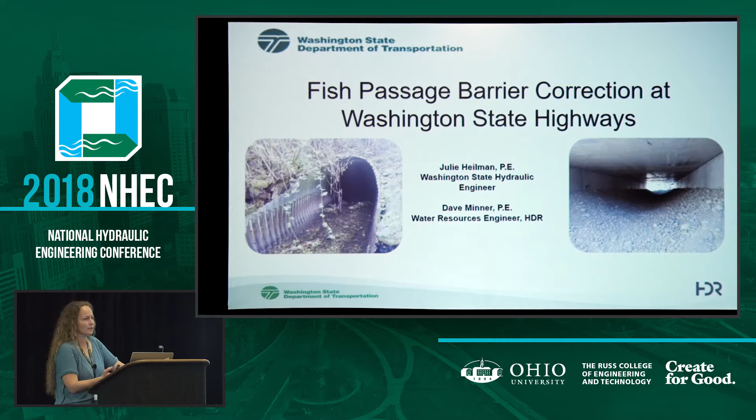So a little history on our Fish Passage program. So prior to 1991, barriers were really just addressed as highway projects or maintenance projects impacted an existing barrier that they couldn't design around. And there was not a separate program. So after 1991, the department actually developed a program. There was a small fund, which a lot of our programs have small funds. But we did have to have a priority of which barriers are to be corrected, and that's what we went to legislative for support on.

And we've kind of been working on that, you know, up until the 2013 injunction, which I'll go over in a little bit more detail. But our primary funding mechanism during that time was still state highway projects, because the funding was very, very low in just the program itself.

So in 2013, there was a federal injunction where basically the Western Washington tribes sued the state of Washington because of the impact that the barriers were having on fish harvest. And the program wasn't really dynamic. Like I said, it was very small funding, and so they wanted an acceleration of the barrier corrections because of the impacts that it's been having on their harvest, and in turn impacted their treaty rights.

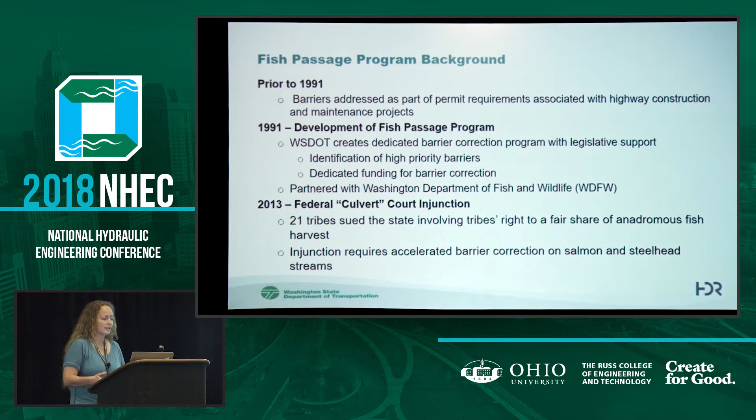So the injunction, just kind of a summary. I know a lot of you guys have probably heard about the injunction and recent appeal, which I'll get into in a little bit. But that's the area of the injunction boundary. So it was not statewide, it was Western Washington. However, our fish passage program is statewide, but the emphasis area, because of the injunction, is in Western Washington state.

So there's a lot of numbers up there, but just in summary, over 1,500 water crossings are subject in the injunction area. There's a lot more statewide, which I'll go into later. There's over 800 barriers that have significant habitat, which is greater than 200 meters of connection or potential habitat connection. Because of course there's going to be barriers upstream or downstream of ours. So we assume those barriers are gone in our assessment.

So as far as what the injunction means to our program, approximately 475 barriers are required to reach 90% of that habitat gain. 171 barriers having less than 200 meters are still required to be replaced in that injunction timeline, but we've been allowed to defer those replacements until the end of the useful life of that structure. And the definition of that is to be determined yet.

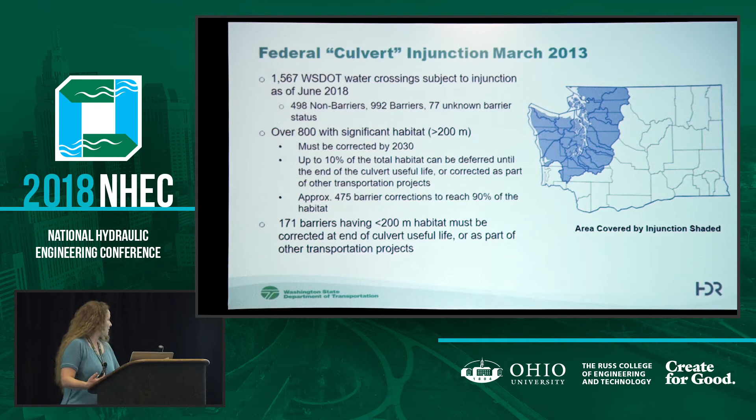So by 2030, we have approximately 475 culverts that we have to replace, and I'll get into a little bit more about that later. So as part of the program, we are partnered with our sister agency, which is Washington State Department of Fish and Wildlife. And their role is really to do the statewide barrier inventory. So annually they go out and do inventory on all of the crossings statewide. So there's over 7,000 water crossings along the state highways. Over half of those have been identified as fish bearing crossings.

So it's a very dynamic program because, again, they go out and assess it annually. So the green are corrections, the barriers that we've corrected. Red dots are total barriers, and yellow or orange dots are partial barriers. That's the dynamic part, because in one year it could be a barrier, the next year it may not be a barrier, or something that was not a barrier could be a barrier. It all depends on the flashiness of the system. So that's why it's dynamic.

And as far as the injunction is concerned, if it's within that boundary, a barrier is a barrier, whether it's full or partial, that part doesn't matter. It's an online database, so the public can access it. We use it as a huge communication tool between the tribes and DFW and all our resource agencies, just to show our progress as we're going through.

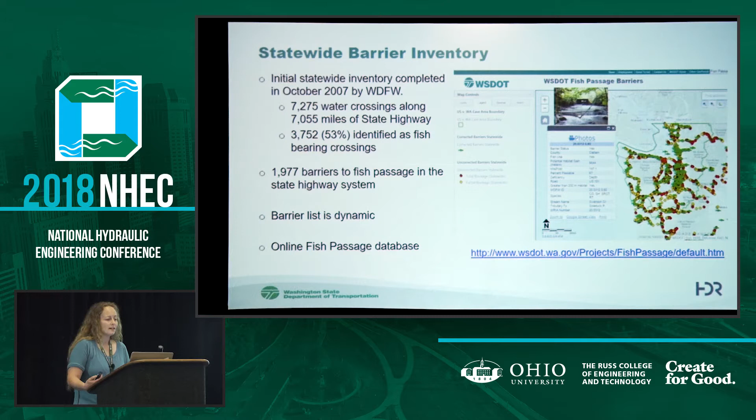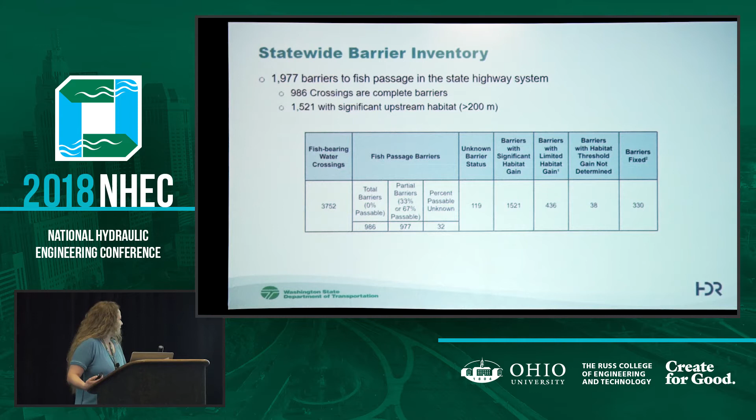It also helps us with our prioritization of our program as we're trying to do bundled projects, because we may have one project that may have like 5 culverts in it, and as I'll talk about later, we're going to see more and more of that in order to meet this 2030 deadline. So I've actually broken this table up into some other slides later on, and I like pictures, so I'm going to move to the pictures instead.

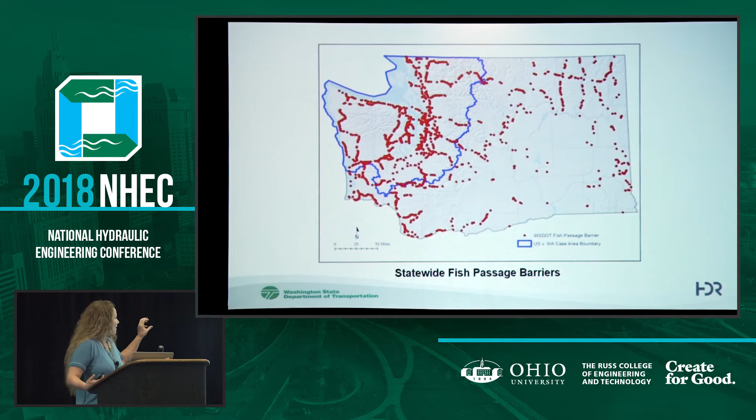So that's statewide. Those are all the barriers statewide that I just talked about. The blue is the injunction boundary, so you can see that's where the heavily populated barriers are because of the Puget Sound area. So to date, since we've been correcting barriers, again, that's prior to 1991, we've had 319 fish passage projects statewide as of last year. We corrected 330 barriers, because like I said, a project may have multiple barriers in it. And we've corrected over 1,000 miles of habitat gain.

So we are moving in the right direction. The acceleration part, since the injunction, that's really where we've accelerated our program. So you can see in 2017, we've corrected 14 barriers. 11 of those were in the injunction, because like I said, the program is statewide, so it's not like we're forgetting about the rest of the state. We are still including those, and I'll talk about how those get programmed later. In just that one season, we corrected 45 miles of potential habitat.

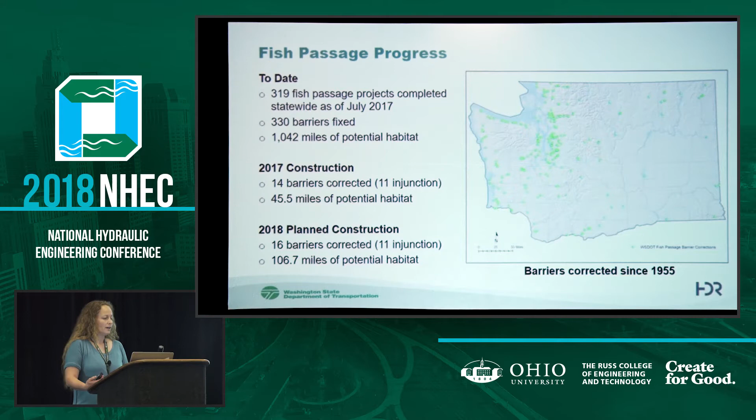This year, and some of the projects go into multiple seasons, we had 16 barrier corrections, 11 were in the injunction, and we corrected 100 miles of potential habitat. So you can see our program, in 2013, when the injunction happened, was about 10 or 11 projects a year, which is what we were trying to budget towards with the appeal. So because the appeal didn't go anywhere, the 2030 date still stays. You can do the math and realize that we're going to have to probably increase our effort by 5 times.

So the current sources of funding right now, of course, emergency funds, like I said, those failing culverts. The state improvement programs, so if there's a project adding lanes or doing safety improvements, and they include a barrier within the project limits, they are now required to replace or correct that barrier. The fish passage program is actually part of a preservation program, so that's where that lives. And then any transportation projects or packages like the Connecting Washington programs, those will all include fish passage barrier corrections. We also have grants. A lot of the rest of the state of Washington gets funding through grants to replace theirs, because our emphasis is on the injunction area right now.

So prior to the recent appeal, our program from 2005 to 2013, which is when that injunction happened, was about $27 million spent. After the injunction, we ramped that up to about $70 million, and that was our plan forward. Because the appeal failed and said you will still have that 2030 date, you can see we still have $2.4 billion of fish passage program to complete, and in order to do that by 2030, we'd be, like I said, about 5 times the effort of what we're doing now. So we'd have to probably do 50 culverts a year. And as far as I've been told, that's what we're going to try to plan for. So we are moving towards that effort as of very recently.

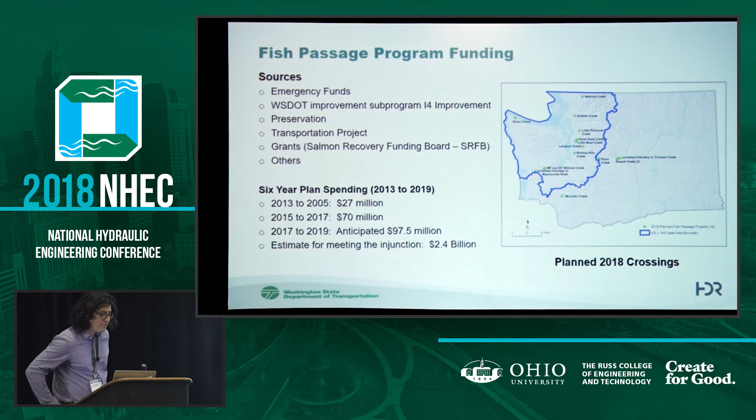Thanks, Julie. As Julie mentioned, I'm going to dive into the design side of the fish passage program. We're going to talk about the design regulations, design criteria, and the design approaches we're taking at each of these crossings. But before we dive into that, I wanted to take a quick step back and talk about what is a fish passage barrier. Simply put, a barrier is anything that hinders any life stage of fish from moving through a waterway. And there's a variety of different types of barriers.

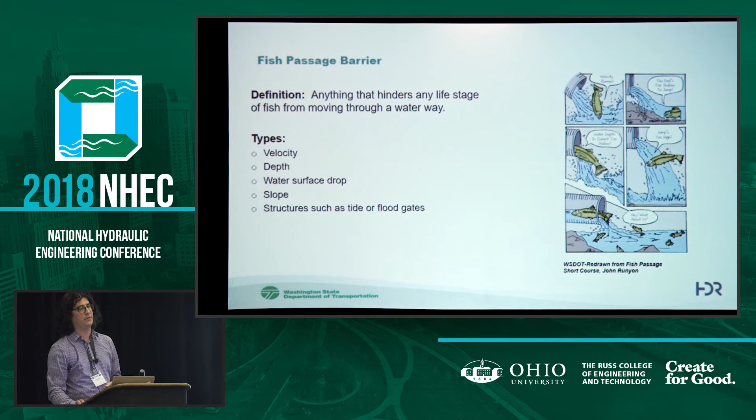Excessive slope: if your structure or channel is too steep, you're typically going to run into faster velocities and shallower depths. The last type of barrier is obviously a structure. These can be tide gates, floodgates, or a dam. This graphic here on the right presents a good indication of, this is for the entire range of fish life stages. So it's not just for adults, it's also for juveniles. So we do have to think about younger life stages.

Next up is the regulations. Regulations for fish passage design in Washington State are defined in the Washington Administrative Code. That's locally referred to as the WAC. The guidelines we follow, the document shown here, is the 2013 Water Crossing Design Guidelines. It's authored by WDFW. It is the primary document that we follow when we're doing the design.

Other documents that we use: DOT has a hydraulics manual. Chapter 10 talks about large woody material design. That specifies and defines what a key piece of large woody material is and how many pieces should be placed in each project. Other references include the U.S. Forest Service, which has a good stream simulation manual, and HEC 18 for our scour calculations.

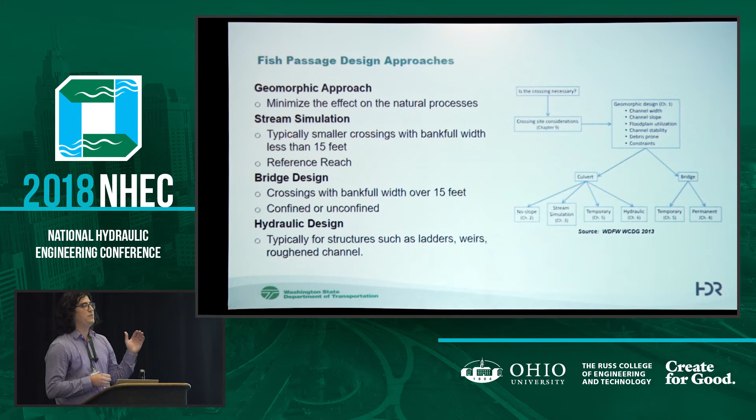Stream simulation is typically applied to smaller crossings with a bankfull width of less than 15 feet. And you do need to locate a reference reach to use in your simulation. Bridge design is for crossings with a bankfull width of over 15 feet. We're typically looking at confined and unconfined settings. And then lastly, hydraulic design, which is not really used, but I did want to mention here. Hydraulic design approach is applied for structures such as ladders, weirs, and also roughened channels and other drop structures. When we're talking hydraulic design, the design criteria you're looking for is velocities and water depths.

So as part of following a geomorphic design approach, we need to collect geomorphic data. So before we start any project, we go out in the field with a large team of people. We go out there with the H&H folks, we go out there with the project design engineers, the stakeholders, which in this case would be WDFW, who is issuing the permit, and also the tribal entities who can provide comments during the design.

Of the pieces of information we collect, the most important is the bankfull width. This is the most important parameter in stream simulation design. And it's imperative that at the beginning of the project, we reach consensus in the field with the stakeholders present. So we want to get an agreement on what that value is before we leave the site that day.

Other pieces of information we need to collect are the longitudinal profile. Typically, we get this information from a detailed topographic survey. WSDOT in general collects survey 300 feet upstream and downstream of the crossing, and then we supplement with LiDAR as needed. In other cases, we also will go out and just take a longitudinal profile to supplement the detailed topographic survey.

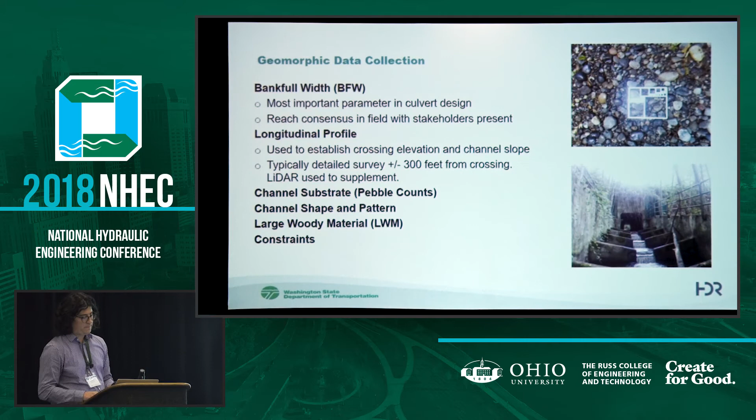So now I'm going to jump into the approaches real quick. Stream simulation approach. As I previously mentioned, it's suitable for sites with a bank full width of less than 15 feet. These systems are typically moderately confined. The minimum opening is sized with this equation that has been established by WDFW, and it simply is 1.2 times your bank full width, and then you add 2 feet and round up to the nearest foot. That gives you your minimum stream simulation opening.

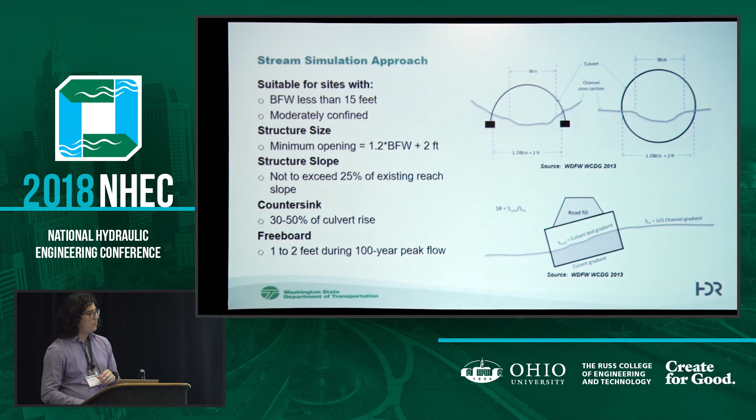This size is also the minimum size we will use for a bridge design approach, which I'll talk about on the next slide. When you're doing a stream simulation approach, your proposed channel and culvert should be at a slope no greater than 25% of your natural upstream slope. Stream simulation culverts are also countersunk 30 to 50% of their rise, which provides for a natural channel bottom. Freeboard on stream simulation culverts varies from 1 to 2 feet and depends on your bank full width.

The bridge design approach is typically used for bank full widths of greater than 15 feet. There's two sub-approaches here. You can have a confined bridge or an unconfined bridge. And that's dictated by what is called the floodplain utilization ratio. It's also called the entrenchment ratio. That's determined by taking your 100-year top width and dividing it by your bank full width. If you get a value less than 3, you're considered confined. If you're greater than 3, you're in an unconfined setting.

For the structure size, when we're looking at doing a confined bridge, we just apply a factor of safety. So first off, we say, okay, here's the minimum opening by stream simulation, and then we increase it based on a factor of safety. Factor of safety should account for uncertainties in your hydrology, hydraulic model, and also for potential channel migration or aggradation.

If you're doing an unconfined bridge, so your floodplain utilization ratio is greater than 3, you need to compare the natural channel velocities to the channel velocities under your proposed structure. WDFW likes to see that be within 10%, so that ratio should be 0.9 to 1.1. Freeboard for bridges is obviously greater. It's 3 feet for bridges when compared to stream simulation. And the freeboard is what is necessary to pass large woody material.

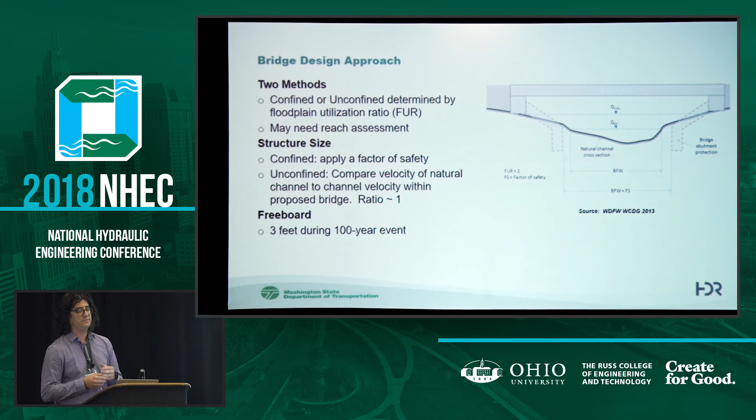For the typical H&H analysis we do on these crossings, we typically model existing conditions, proposed conditions, and then sometimes natural conditions, which is a version of the existing conditions model with the existing structure and roadway embankment removed. Previously, we've been doing a lot of these models with 1D HEC-RAS. Now the crossings are being done in SRH-2D. The results from the modeling are used in the scour analysis, sizing the proposed streambed material, habitat design, and also showing compliance for design criteria.

For hydrology, we're using gauge data when available. Otherwise, USGS recently updated the statewide regression equations in 2016. Other times we'll use available studies, such as a flood insurance study. And climate change could be a whole presentation on its own, but I wanted to mention that for a site that has been identified as vulnerable to climate change, we're actually using the 500-year event to do the design. And one other point I didn't make on here is that right now, for some of our bank full calculations, we're using the 2-year return period flow.

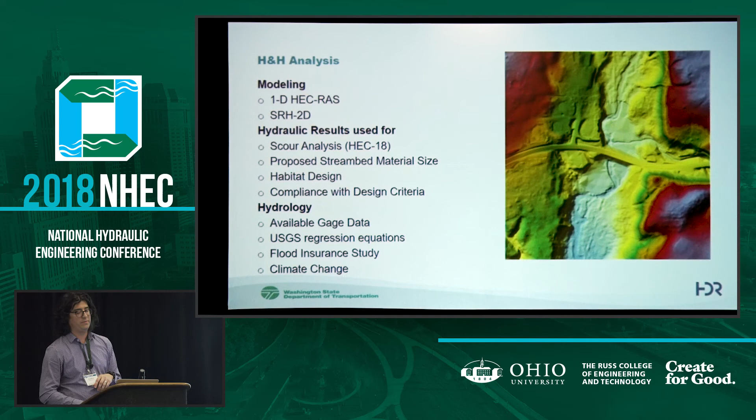I wanted to touch briefly on proposed streambed material.

There's 2 ways where we're essentially designing and specifying the material for our proposed site. The first is simply match what's there already. So go back to our pebble count and come up with a gradation that is close to what's out there. And this is typically for systems that are in equilibrium and we don't have a sediment supply problem.

For sites where we want to see some stability or more increased stability, what we'll do is actually look at incipient motion calculations or a unit discharge method, and we'll size our D84 size particle to be stable during the 100-year event.

Specifying proposed streambed material, what we typically do is percent by volume, and to make it easy on the contractors, we're using standard WSDOT items, so streambed sediment, cobbles, and boulders. And we'll say 30% streambed sediment, 70% cobbles. Contractor will just take those scoops on site, mix them up, and then put them in the stream.

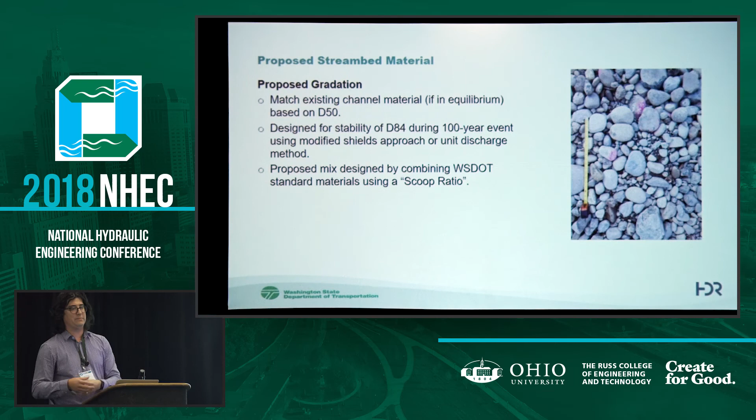So now that I blew through the design methodology and approaches, here's just a quick example. This is Fisher Creek. It's a confined bridge. It is just north of Seattle on Interstate 5, about 50 miles north. The existing bankful width we determined on site and through hydraulic modeling was 24 feet. The existing culvert was an 8-foot CMP and it was retrofitted with baffles.

Again, this is a confined system which was verified by the site visit and hydraulic modeling. It had a floodplain utilization less than 3. The constraints in this crossing are immediately upstream is a county fishway and a box culvert.

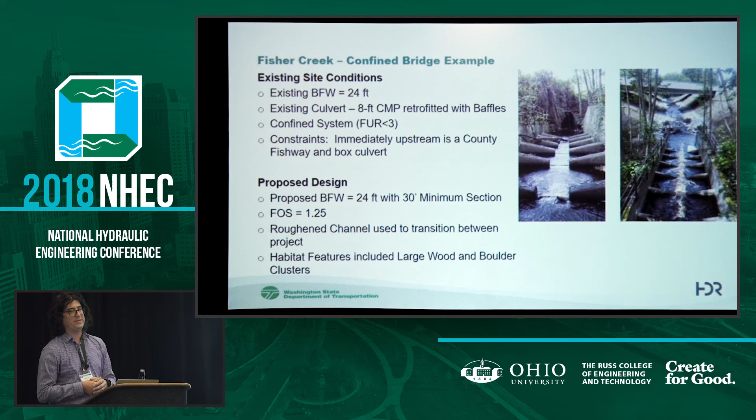The proposed design, we ended up with a 30-foot minimum section. That was based on a factor of safety of 1.25. The other features in the project included a roughened channel to transition from our section to the existing fish ladder. And then we also included habitat features, which included large woody material and boulder clusters.

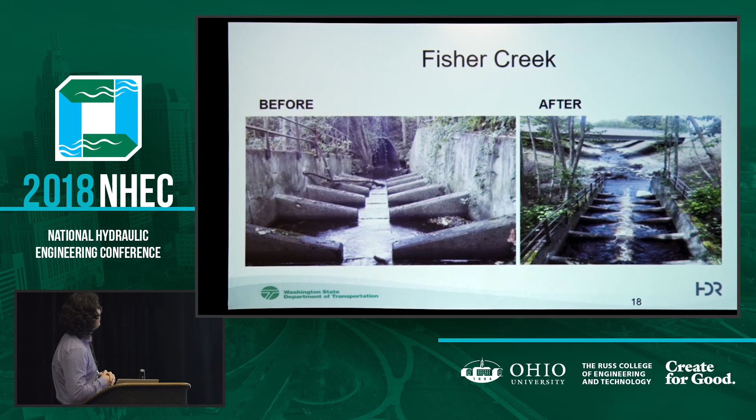So this is just a better picture. On the left, you can see we're looking downstream from the top of the fish ladder. That dark area in the background is the 8-foot CMP. Then on the right, you can see that the section has been dramatically changed and increased.

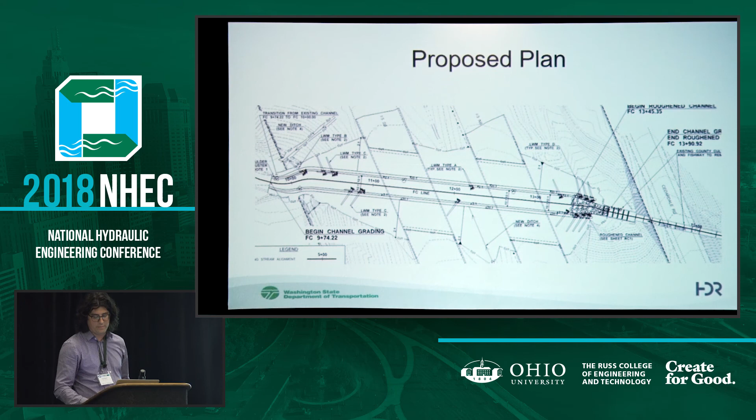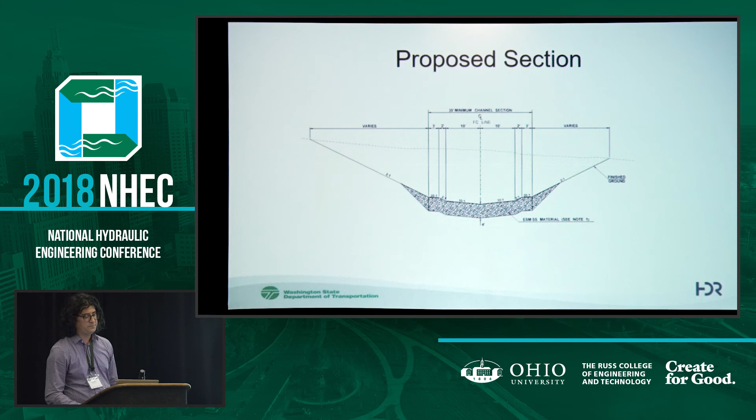So, with that, I wanted to jump over to lessons learned to wrap up the presentation. This is specific to Fisher Creek, but Julie's also going to interject and talk about some of the others on other crossings. This first bullet point, we came up with a bankful or a proposed opening of 30 feet. This was less than the stream simulation equation, and that resulted in, one, us deciding to use the stream simulation as our minimum opening width, even for bridge designs. But really what it meant was additional coordination with stakeholders, alternative analysis, and hydraulic modeling, which impacted schedule and resources.